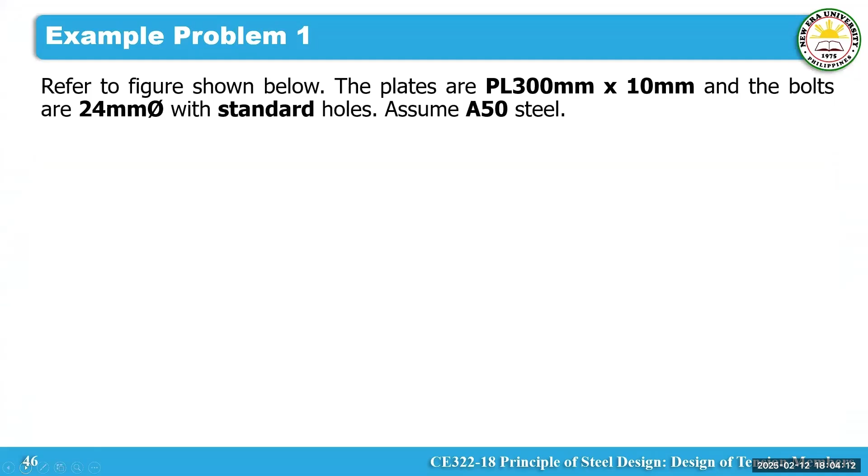Problem tayo ngayon. Example problem number one. Okay? Sige, pakibasa nga to.

Pakibasa nga yung problem natin. Mr. Aaron Marcelino.

Calculate the design strength in kilonewton against yielding failure. Ay, yun ba yun? Obviously, you need to start dito, no? Ay, sorry, sir.

Refer to figure shown below. The plates are PL 300 millimeter by 10 millimeter, and the bolts are 24 millimeter with standard holes. Assume A50 steel. Calculate the design strength in kilonewton against yielding failure. Determine the net area in millimeter squared and find the design strength in kilonewton against rupture failure.

Okay, sige. So, thank you, no? So based sa problem, yung problem natin, it involves splice plate connection as shown, no? So single lang yan. Single tayo. Meron tayong top and bottom plate, or pwede mo sabihin right or left plate. So depende sa iyo. Meron tayong 3 by 3 configuration ng bolt holes.

So yung letter item A, pinapahanap sa atin is yung design strength, yielding failure. So item A.

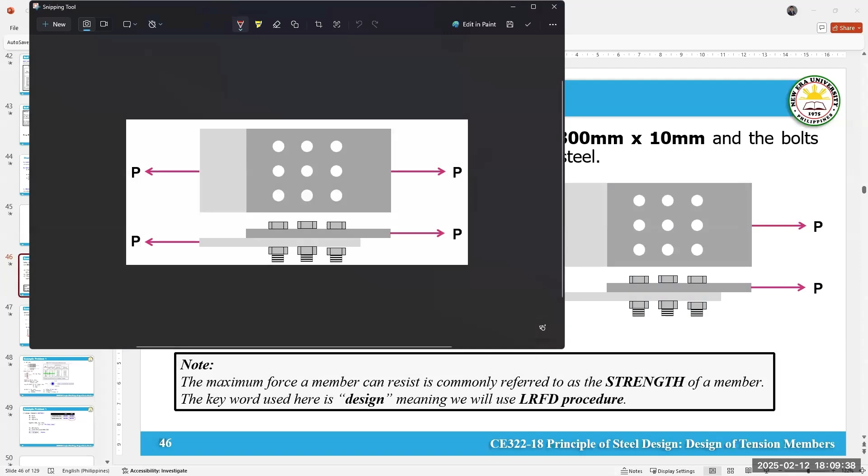Ay, okay, so yielding daw, no? Yielding. So ang sabi natin kapag yielding, if we would go back again dun sa kunin natin itong figure natin para mas may makita tayo. Kung kukunin natin yung figure na yan and ang usapan natin is yielding, so common sense yun. Kung yielding, it would happen dun sa gross area.

So kung gross area yon, sabihin natin sa top plate muna tayo magko-focus. Yung pinaka ano mo talaga, yung pinaka gross area mo would be here. Would happen here. So pag tumingin ka sa top plate, andito yon. Okay? Yan yung gross area natin. Okay? Yielding daw eh.

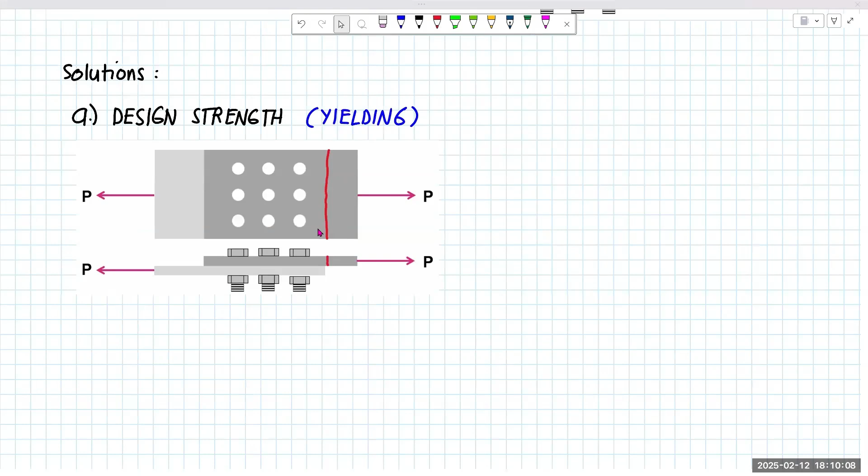And nung nag-section tayo, obvious din yon. Ang makikita mo is somehow yung ganito, no? Ito yung makikita mo. Okay? Ito yung pinaka makikita mong section. Okay?

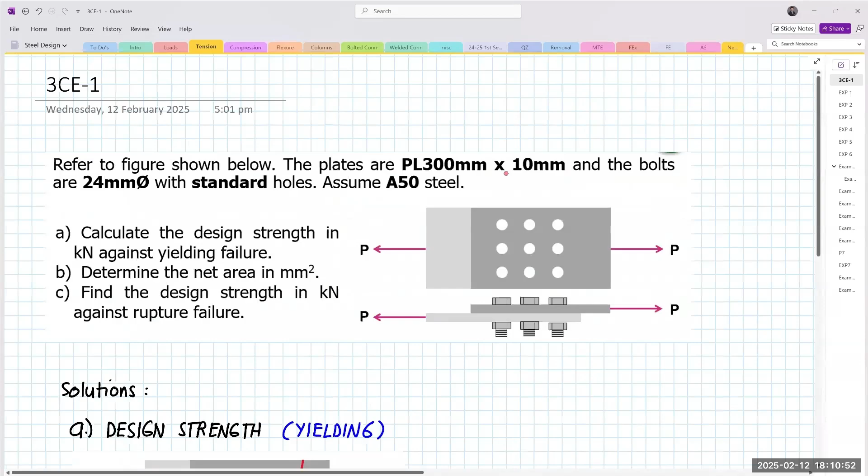Okay? And we have a dimension as per problem. Ang sabi, ang total width mo daw 300, thickness is 10 millimeter. Okay? So all in all, you will have this distance, no? 300 millimeter, and this distance naman, okay, na 10 millimeter.

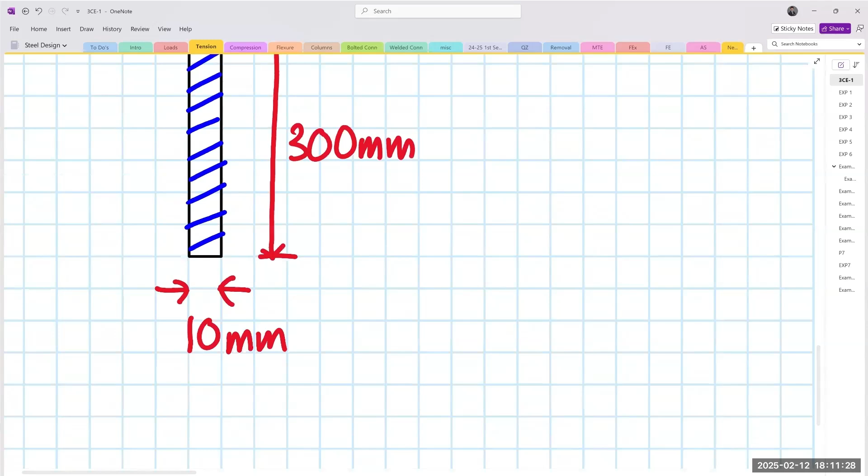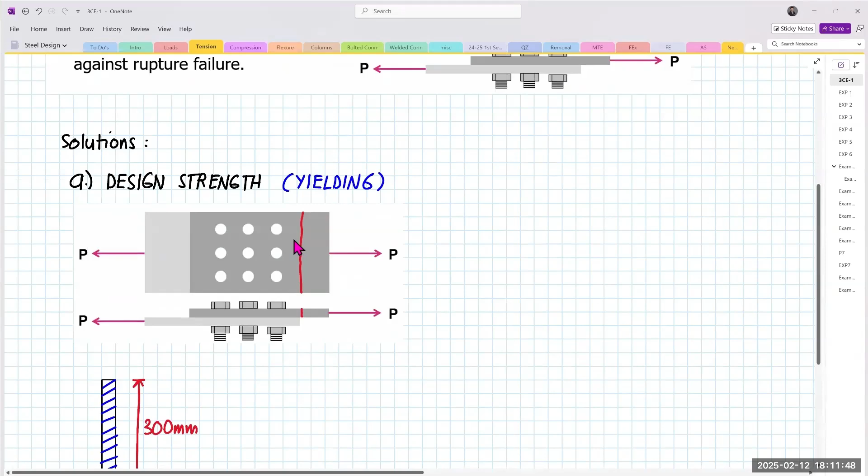Okay? Now, if we would go back dun sa formula ng yielding, going back sa presentation natin kanina, okay, alam niyo na to. The formula for nominal capacity is P sub n equals to area gross, tapos Fy. Yan lagi yung magka-partner pagdating sa yielding mode of failure. So we could say now na yung formula natin is P sub n is equal to area gross times yield stress F sub y.

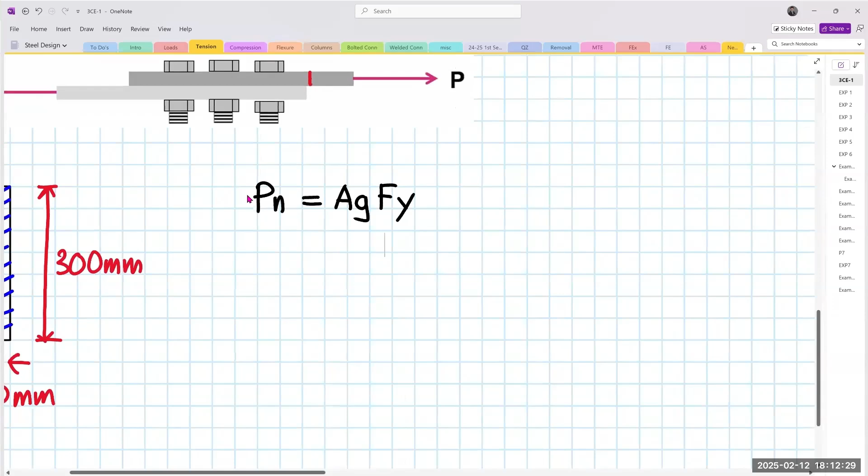Now, ang pinapagamit kasi sa atin as we have discussed, LRFD. And this is nominal value pa lang. So, going back dun sa formula, pag LRFD, ang pinapagamit, yung design strength talaga natin, P sub U is equal to phi sub T times P sub N. So, i-list natin yung mga formulas na gagamitin natin. So, we could say now that P sub U is equal to the strength reduction factor phi sub T times P sub N.

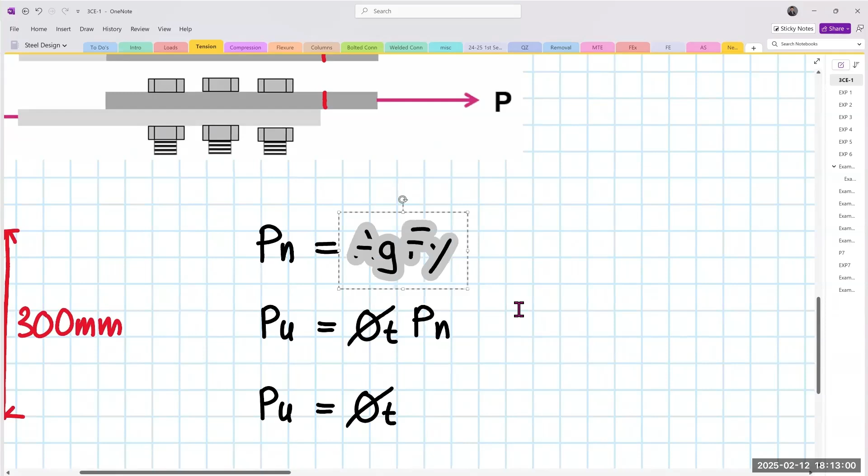Okay. Now, there's something that we could do to simplify our calculations. We could plug in yung value ng P sub N na ito. So we could say na from this equation, we could simplify it further para isang calculation na lang. And then this would be our final values. Final values. So sige, i-solve natin yan.

Okay? So P sub U now, or the design strength against yielding, is equal to the phi sub T, and yung value ng phi sub T natin, ano yung value natin for yielding? 0.9, as per code. Okay? 0.9.

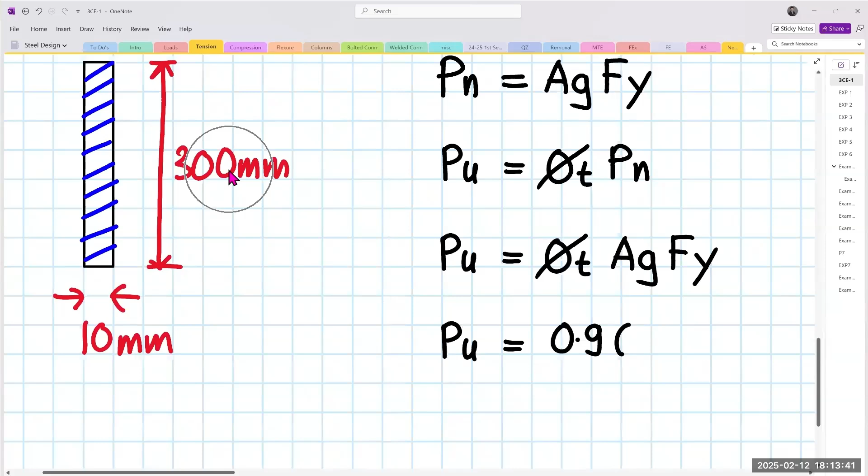Okay? And then yung area gross daw natin, going back tayo dun sa section cut, gross area 300 by 10. Okay? 300 by 10, okay, times F sub Y. F sub Y, so yield stress. So again, dito, kapag ka sinabi A50, ano ba yung Fy na gagamitin natin?

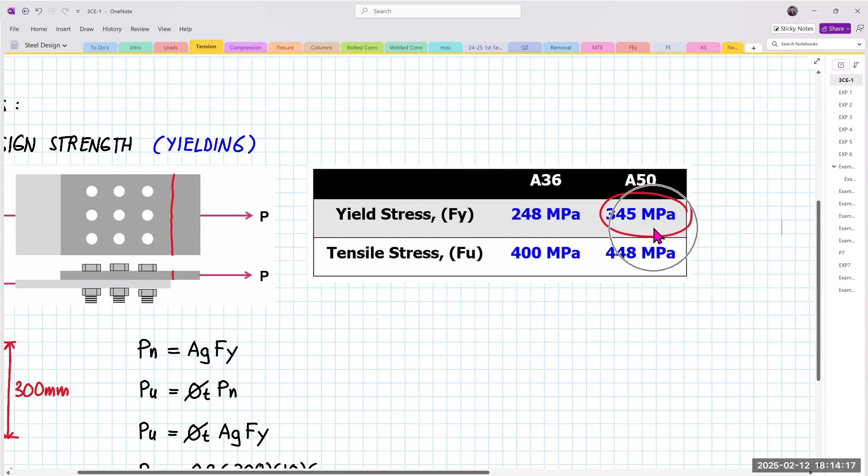We said that for A50 steel, its counterpart has Fy equal to 345 MPa. So let's use 345 for our Fy.

Okay, MPa. Now let's do a unit check. We'll only do this once; for the rest of the equation, it's most likely the same. Let's simplify. So this, the 300 and the 10, is in millimeters. The 345 is in MPa.

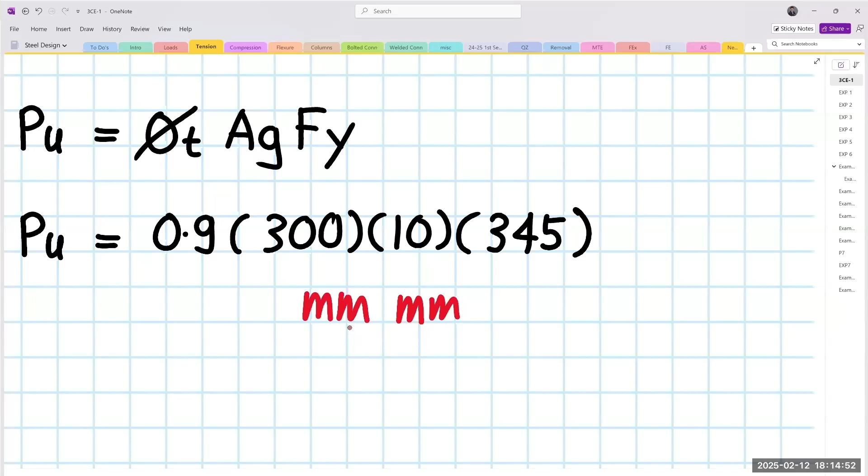I want to emphasize this, though you already know it. 1 MPa is equal to 1 Newton per millimeter squared. So that means this 345 MPa is Newton per millimeter squared, and therefore you can cancel out the millimeter, leaving Newton.

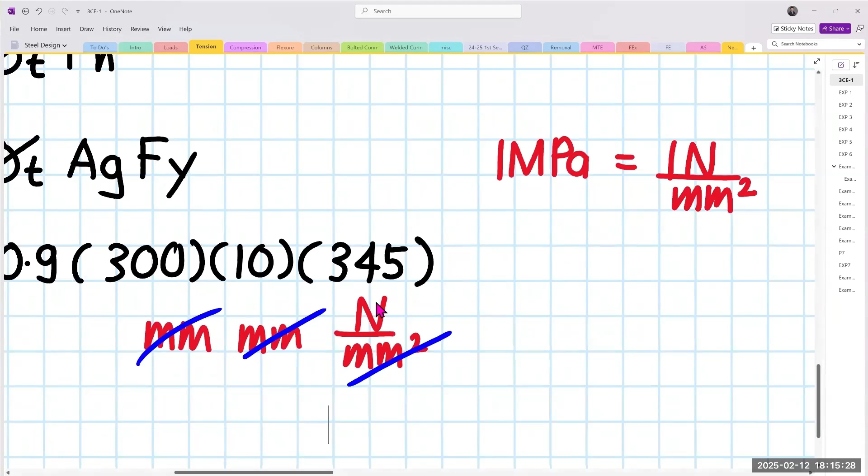But for calculating capacity, we want kilonewton. So we still need a conversion factor to account for this. We already know that one: since Newton is in the numerator, we convert Newton to kilonewton. 1 kilonewton is equal to 1,000 Newton.

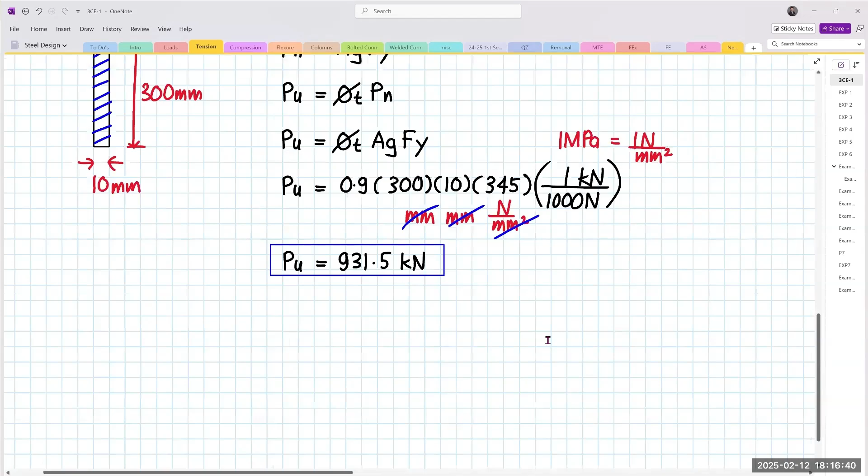Item B asks to determine the net area. This is just preparation for item C, since you can't calculate the rupture without the net area. So let's calculate the net area first.

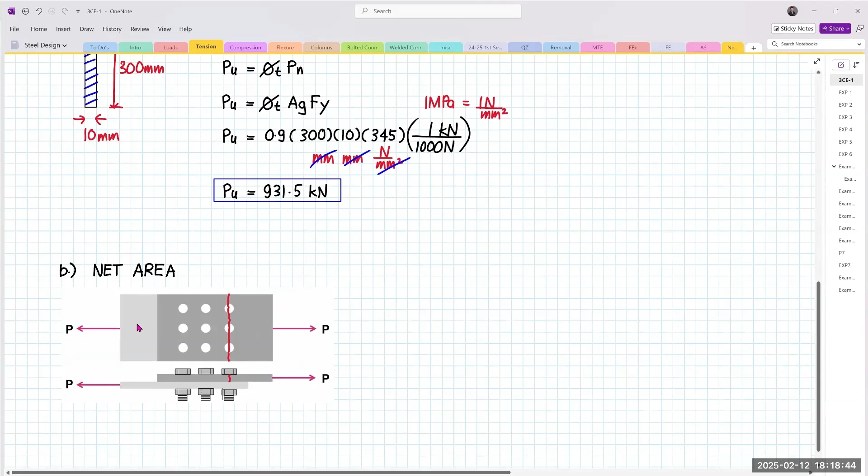Since the width and thickness of both plates are the same, whether you consider the top or bottom plate, the result would be the same, because both plates carry the same load P, just equal but opposite in direction.

So when it comes to rupture, as we discussed, if we look at the top plate, the critical one is this first line of bolts, in terms of the rupture. Now let's calculate, since we made a cut here, we have a section cut.

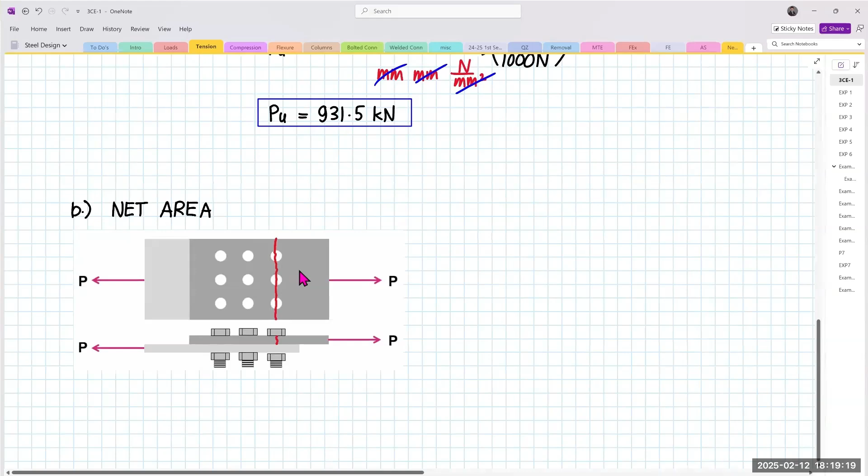We need to sketch our area again, for the sake of this demonstration, to show our failure path, or our section.

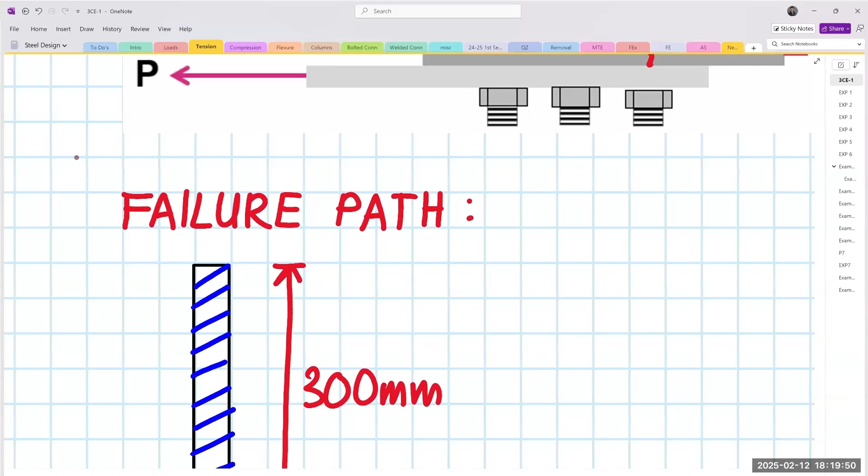So this one is for the gross area. Let's delete these areas and add the width for the bolt holes, assuming these are our bolt holes. Here in the section cut, three bolt holes are hit. This is the first, second, and third bolt hole.

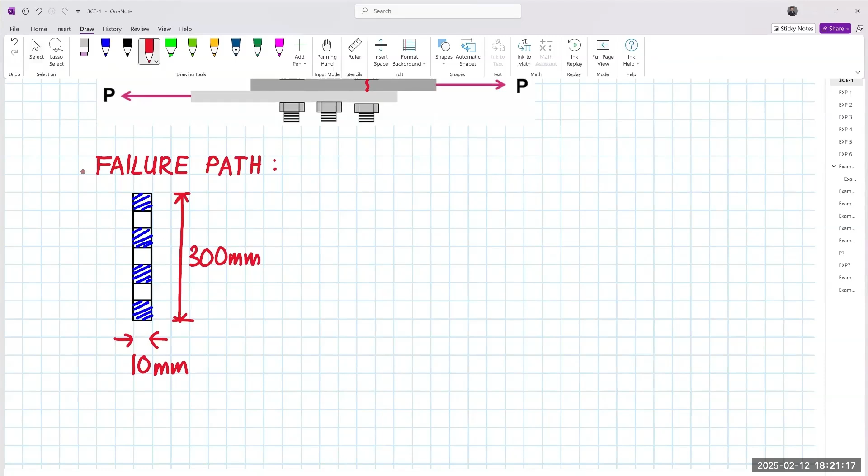And therefore, to calculate our areas, we need to determine these distances. These are the distances, as we already discussed earlier. These are our bolt holes.

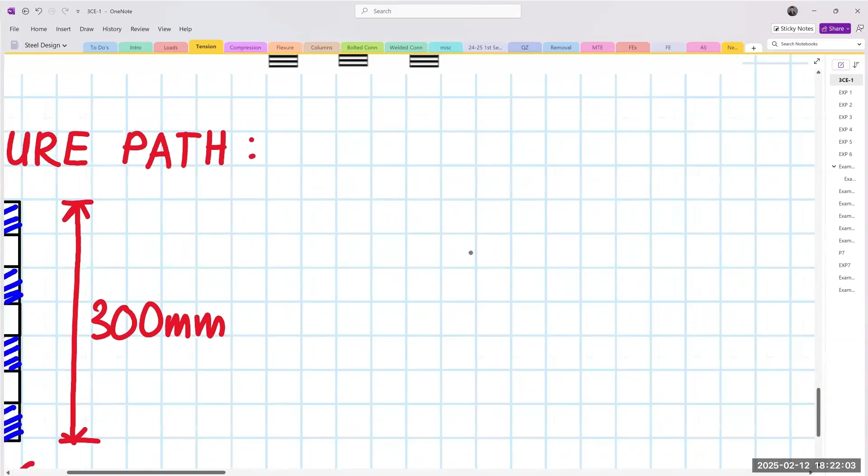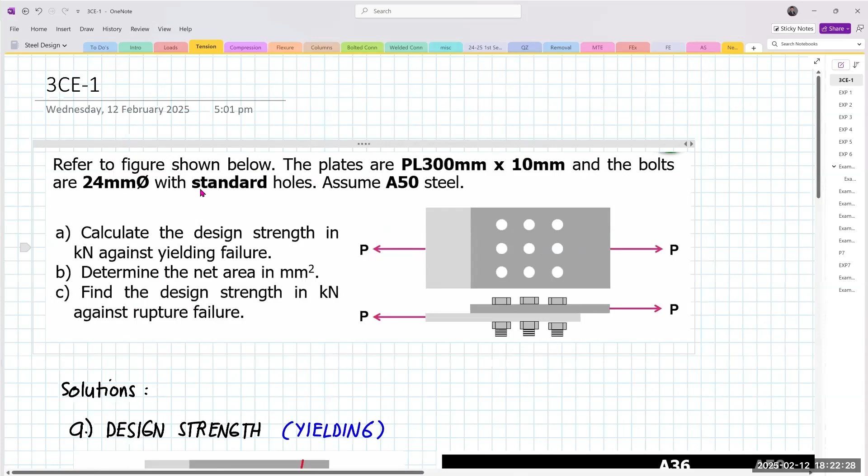D sub B. Which is ano yung binigay sa problem? Sa problem, gamit daw tayo ng 24 millimeter diameter. And ang clue for the hole dimension is standard. Gamit daw tayo ng standard. So 24 millimeter yung diameter of bolts.

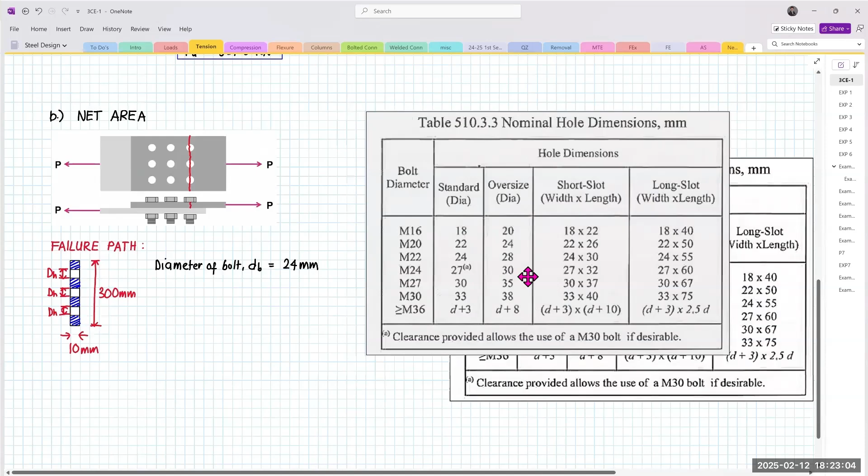Para mas masolve natin to ng maayos, we need to go back dun sa table, pagdating sa nominal hole dimensions calculation. Yung table na to, copy natin yan, tapos dalhin natin dito para mas ma-reflect ng mas maayos. Kung i-check natin yung ating mga values, ang sabi sa problem, 24 millimeter na bolt diameter. Ito yung column na yon.

Tapos, ang sabi niya, gamit ka daw ng standard. Ibig sabihin ng counterpart niya, na nominal hole dimension is 27. Yan yung ating nominal hole dimension. Sulat natin dito.

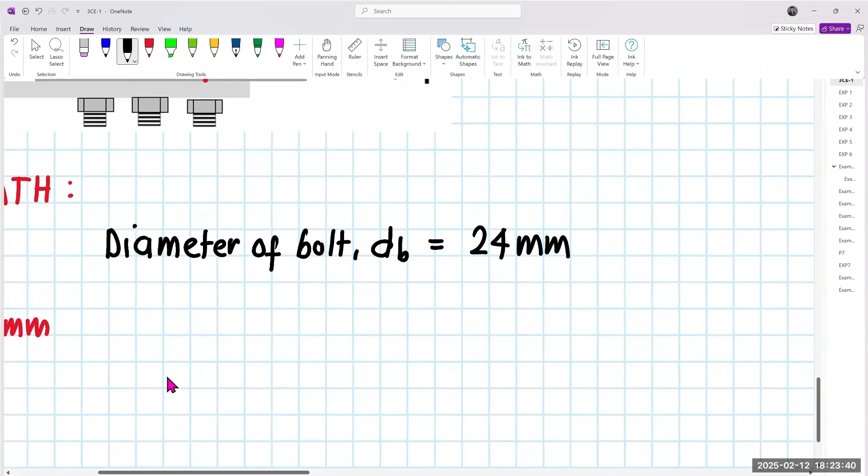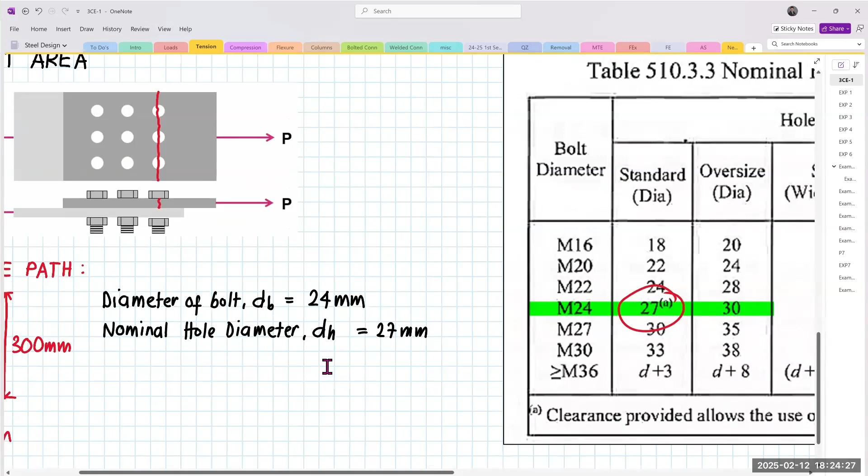Dito, small letter D sub H tayo, sabi natin we need to use 27 millimeter. Pagdating dito sa tinatawag nating tolerance, basically yung tolerance na yun lang yung, yung tawag dito, difference ng dalawa. So 27 minus 24, ibig sabihin meron tayong 3 millimeter na tolerance. Mas malaki yung ating hole dimensions by 3 millimeter, para magkasya yung bolt natin.

So we could say na yung ating tolerance na gagamitin natin dun mamaya on our calculation is equal to 3 millimeter. Now, going back dun sa final formula natin, napakita na natin kanina, that is this one. I-copy na lang din natin ulit. Since yun yung formula natin, we could say na ito talaga yung pinaka-formula natin na gagamitin.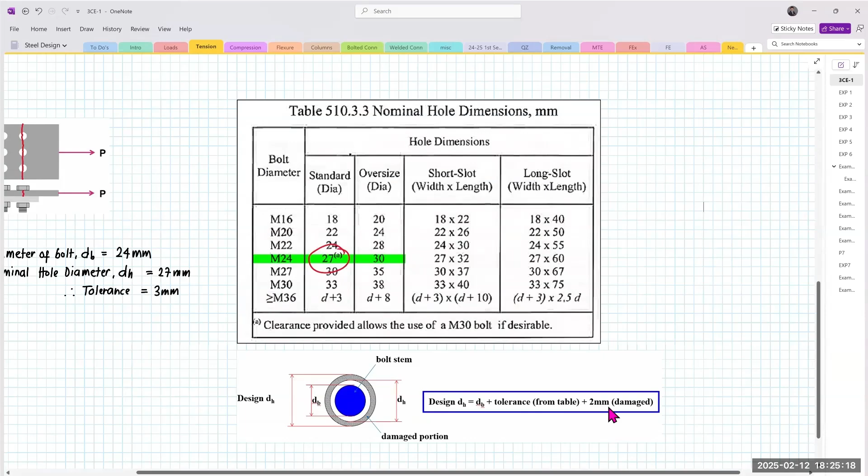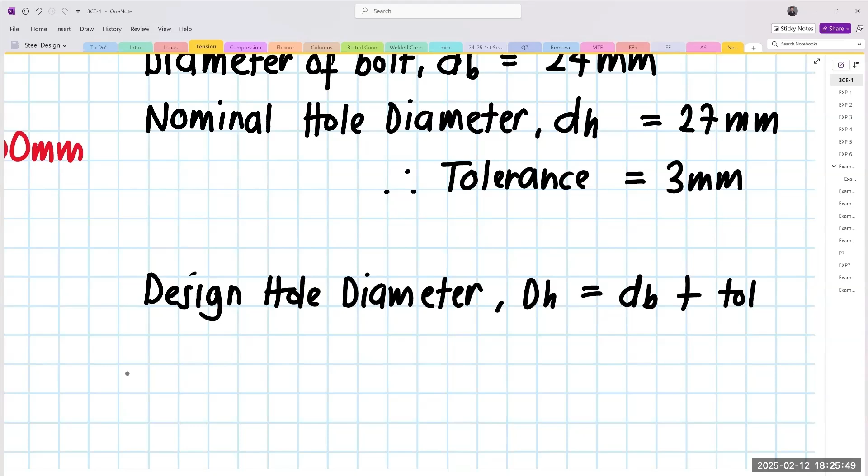So that is the design diameter, the diameter of the hole is the diameter of bolt plus tolerance plus the automatic 2 millimeter or the damage portion. So therefore, we can say now that the design hole diameter, D sub h, is equal to the diameter of bolt plus the tolerance plus 2 millimeter, for the damage portion.

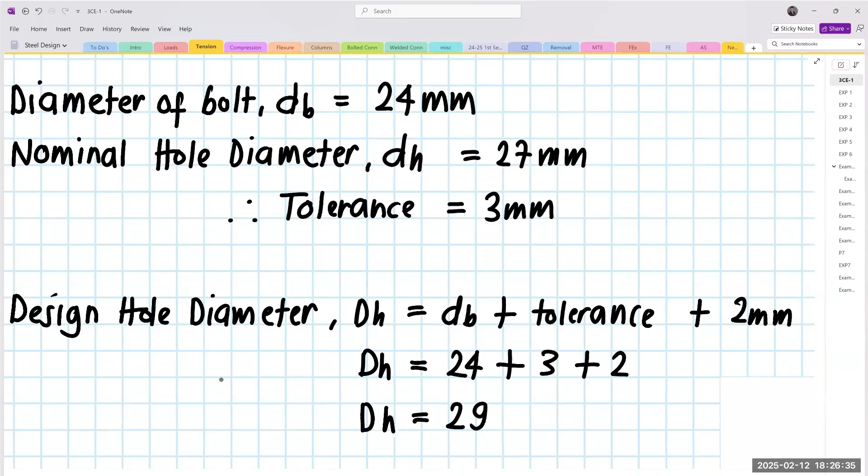So we would have the diameter of hole is equal to the diameter of bolt, that is 24, plus yung tolerance na na-calculate natin, 3 millimeter, plus 2. So all in all, we have the diameter of hole, design hole diameter na gagamitin natin equals to 29 millimeter. Ibig sabihin, na-define na natin yung dimension na to. Meron na tayong dimension na yan.

And then, as we have mentioned, yung net area kasi, yun lang yun eh. Yung lahat, yung sum ng area nung naka-highlight na yan. Ibig sabihin pala, kung i-define natin yung parang pinaka-formula talaga natin for area net, based dun sa logic na yun, we could say na yung ating net area, teka lang.

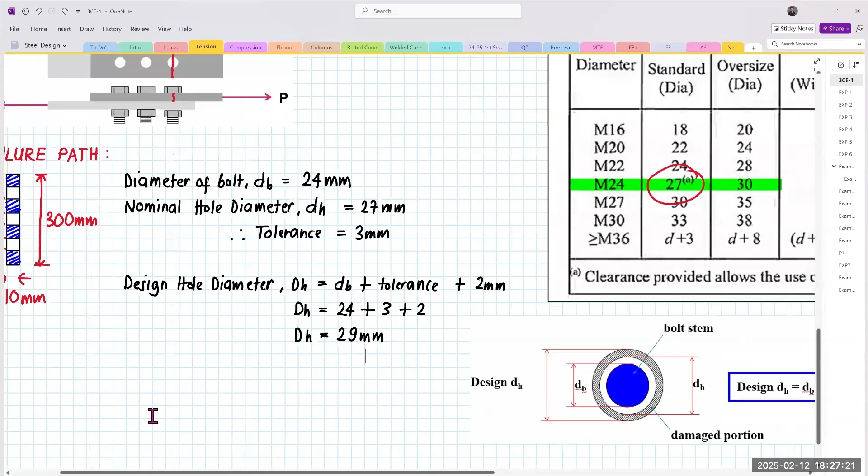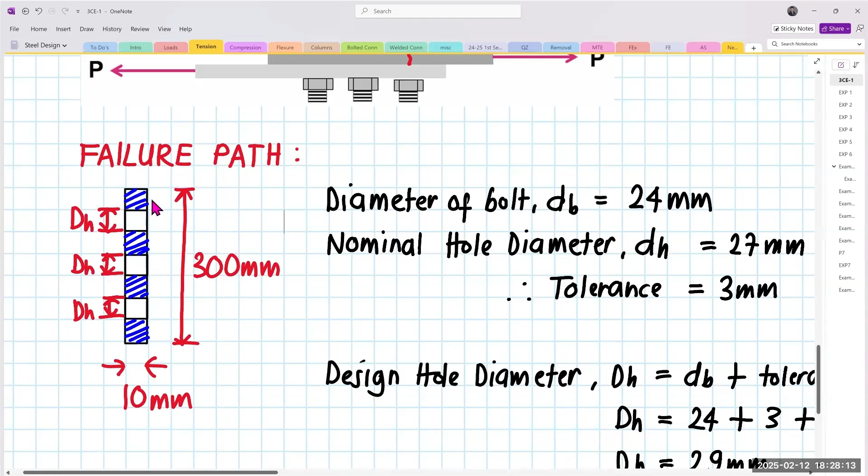Tapos ibabawas na lang natin yung area occupied by our bolt holes. Pag binawas natin yung area occupied by the bolt holes to our total or to our gross area, magkakaroon tayo ng blue shaded area, yung net area, na mag-resist dun sa applied load. So ibig sabihin, area net is equal to area gross minus yung area ng ating mga holes. As simple as that.

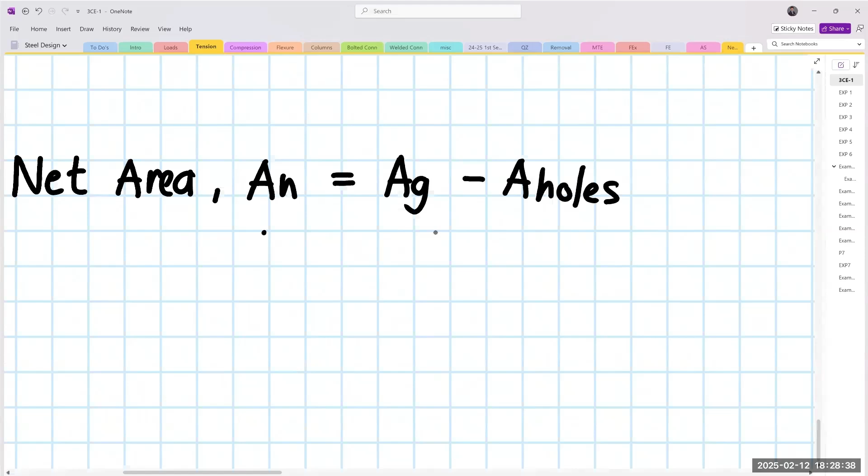Sige, calculate natin. So we could say now that area net is equal to area gross. Again, total width natin is 300, thickness natin is 10. Yung area ng isang holes natin, again area ng isang holes, 'di ba? As simple as ano lang 'yan eh, kung babalik tayo dito sa figure na 'to, ang area ng isang holes.

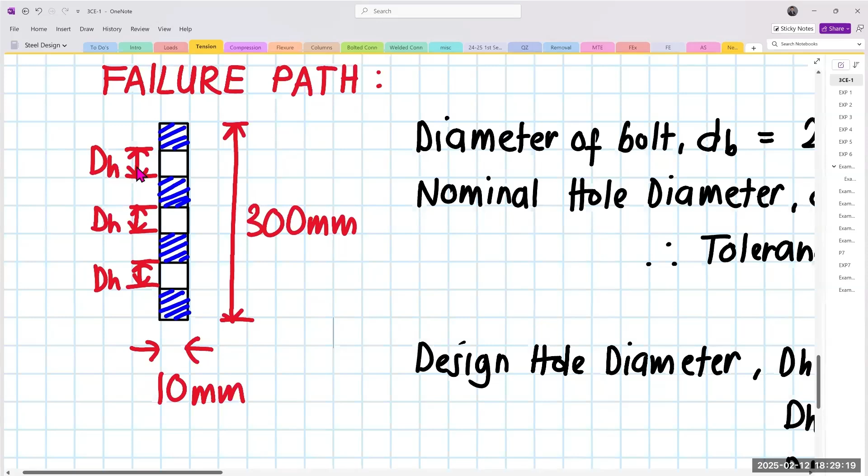Is the height niya, yung diameter of holes, times the thickness of your plate, which is yung 10 millimeter. As simple as that, height times length, or sabihin natin height times width. So yun nga, diameter of holes times thickness of plate, yun yung area ng isang bolt holes. Again, diameter of hole na-calculate natin, that is 29, yung width natin is 10. So 29 times 10.

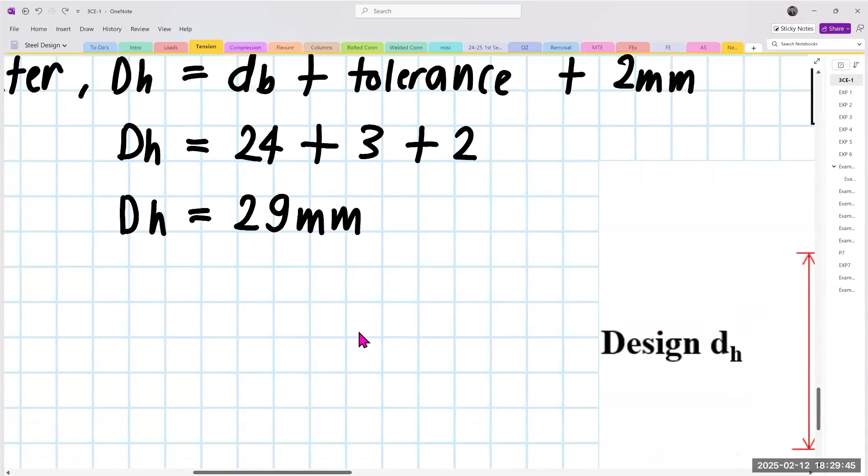But then again, this is just one area or one hole. So all in all, we have three bolt holes. So that means we need to multiply this by 3, the number of holes, multiplied by 3.

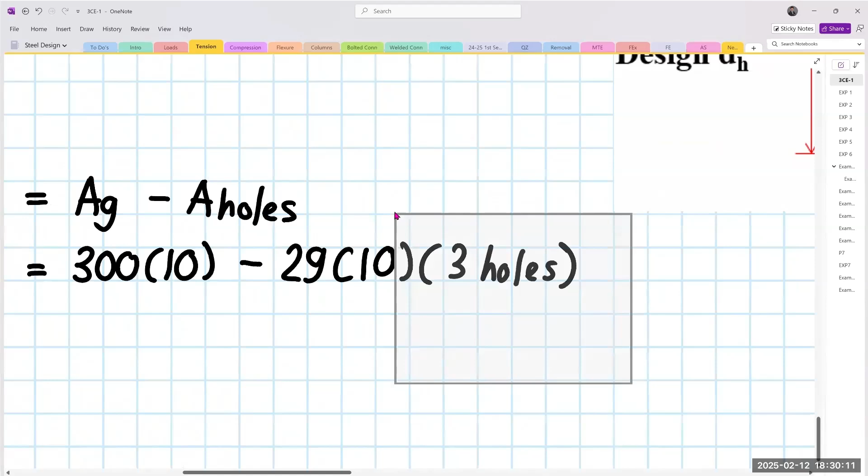So let's summarize our equation. We have area net equals... how much is this? 2,130. Okay, millimeter squared.

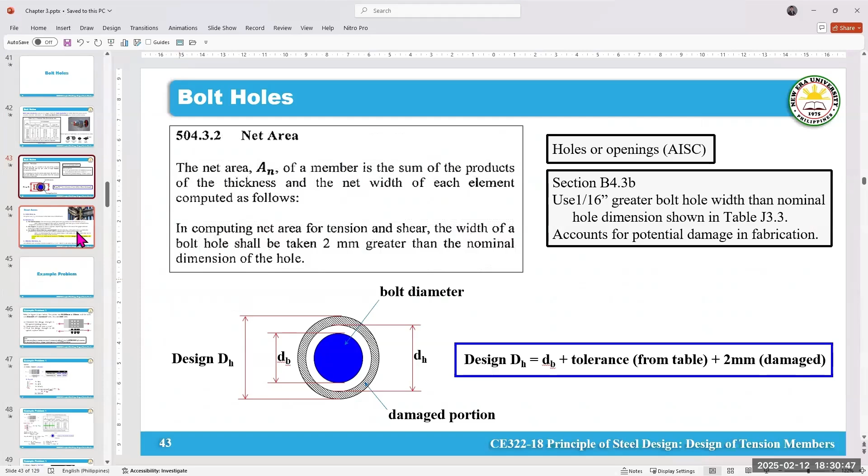So we're okay with the area net now, this is our answer. Before we end the discussion for this one, I want to reflect again on steel areas, although it was shown here for bolted plates that the net area is the gross area minus

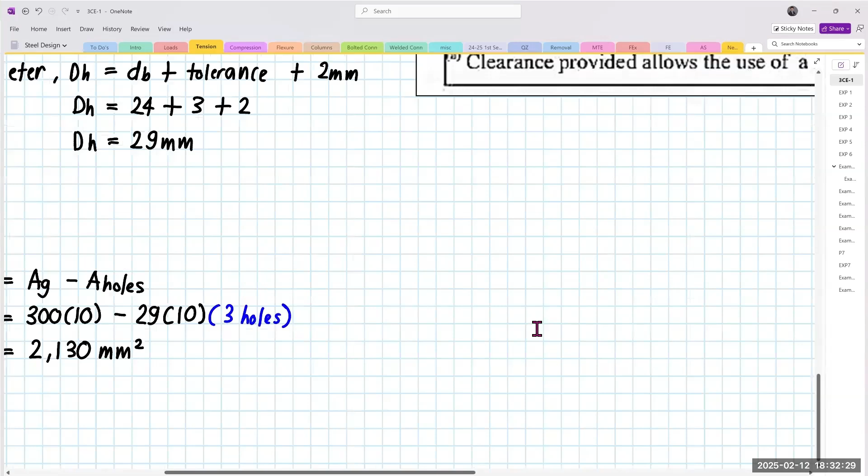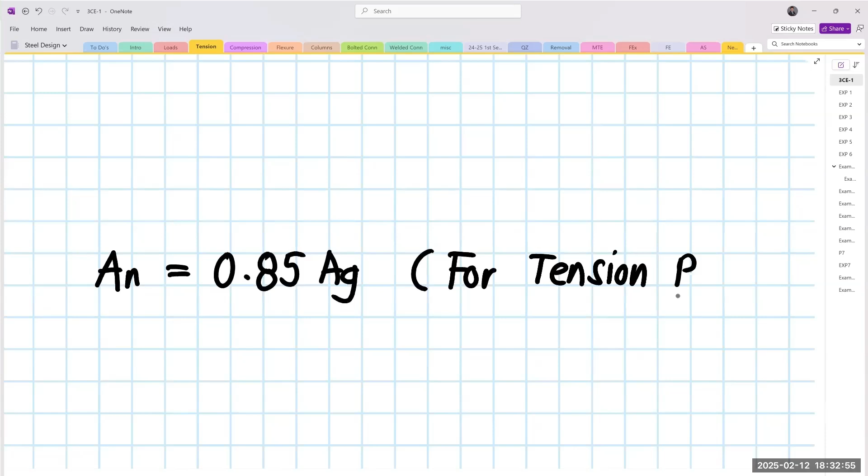Aside from this, we need to account for one more formula as per the code, which is our maximum limit for area net, equal to 0.85 AG. Let's take note that this one is for tension plates. Applicable, okay.

So let's hurry up to finish. We would have the area net, another value of area net that we need to check, so we would have 0.85 times the area gross, 300 times the thickness. Okay, we would have area net equal to... how much is this? 2,550. Millimeter squared, okay.

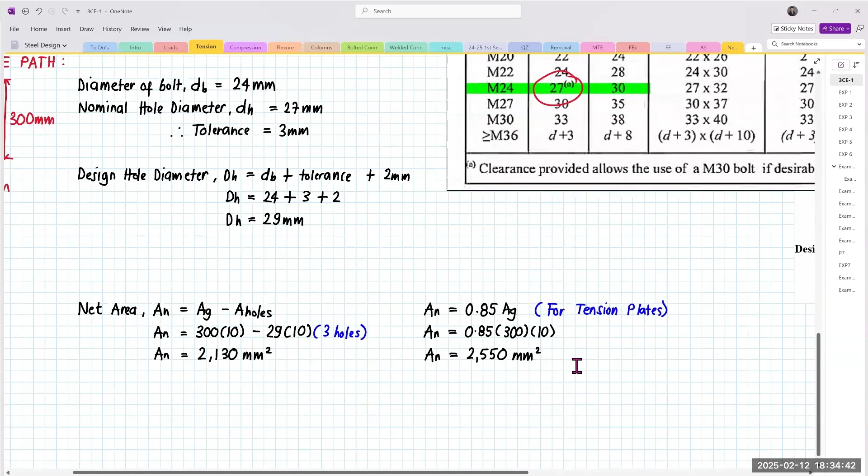So since our maximum limit is this value, and it's greater than the actual area net we calculated, that means we're okay, because it's bigger.

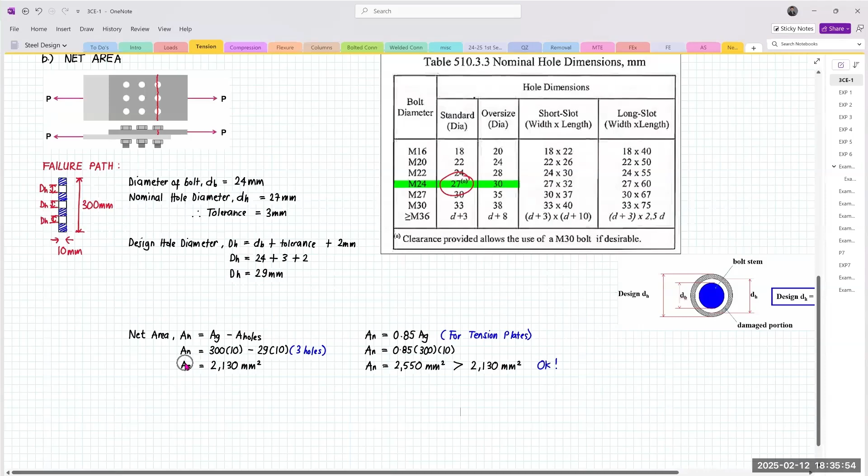Okay, so we already have the net area, we're done with item B. We'll now proceed to item C, which is the design strength against rupture failure, item C. Let me just get this.

Okay, rupture failure. Here we don't need much sketching anymore since we already sketched it in the area section, so we just need to go back to the formula. What do we say about rupture? Again, the nominal capacity P sub n is equal to A E F sub u.

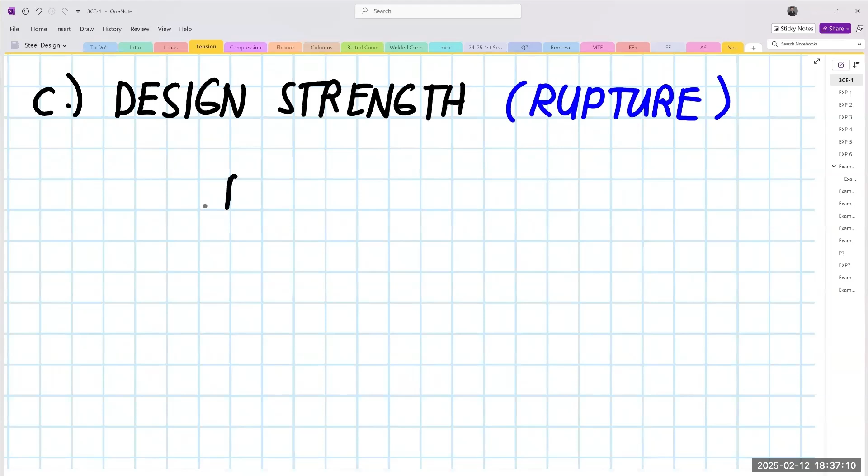So let's list out our formulas. The nominal capacity for rupture is as simple as P sub n equals A sub E, the effective area, times F sub U. Now we need the design strength, meaning we need to get P sub U, and here's the formula. Let's copy again, phi sub T times P sub N, that's our P sub U.

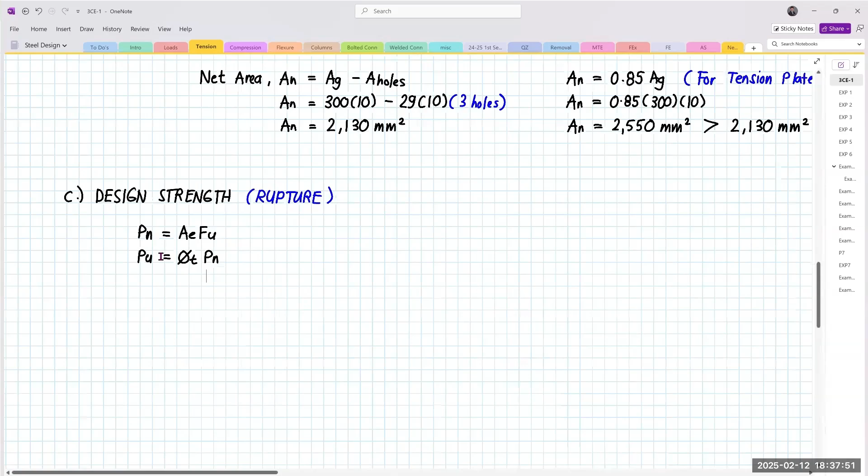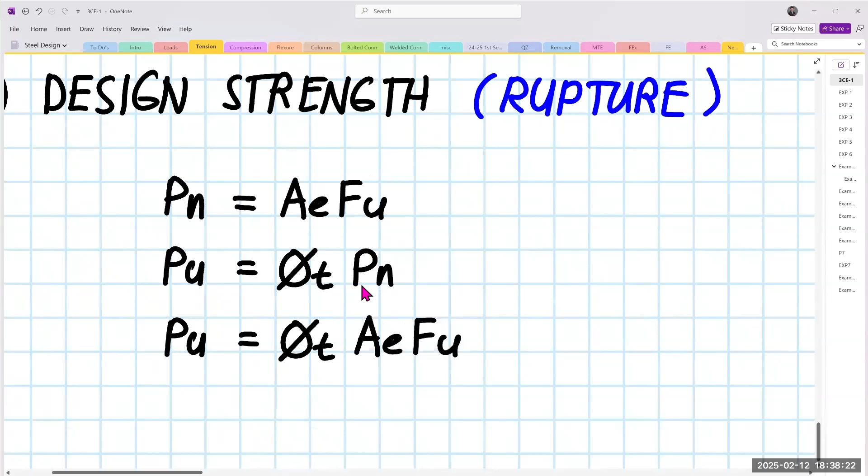Now, still the same, let's discard this, we already have this one. So we might as well simplify by plugging in the value of P sub n, which is this. Let's copy that, and this would be our enhanced formula. Now, I just want to note that this one is critical, or it governs.

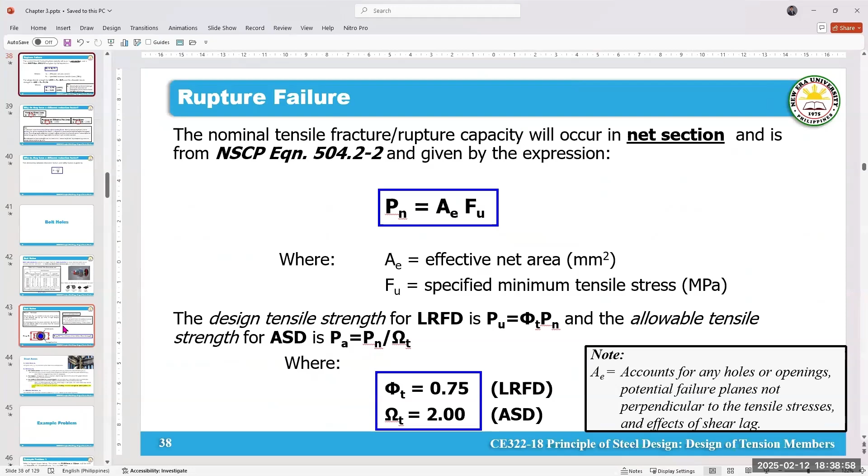Ang problem is yung nakalculate natin na area as of the moment, area net. Wala pa tayong A sub E. Okay, so ano ba ibig sabihin ng A sub E? Puna tayo dun sa still areas calculation. Yung A sub E, or the effective net area A sub E, is...

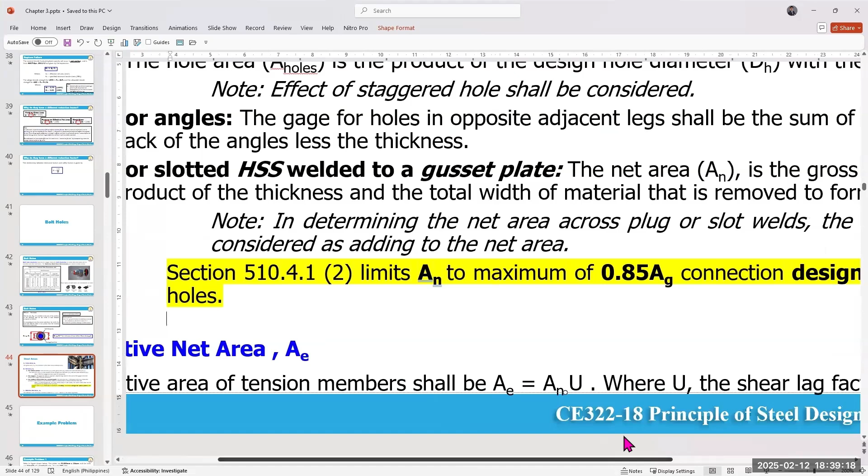This equation: A sub E is equal to area net times the factor, the letter U, which is the shear lag factor. So yun pala yung formula ng effective area. Ang sabi sa code, the effective area is equal to the shear lag factor U times area net.

Now, meron na tayong area net. Na-calculate na natin yung area net, andito sa taas. Ang question ngayon is, ano yung shear lag factor natin?

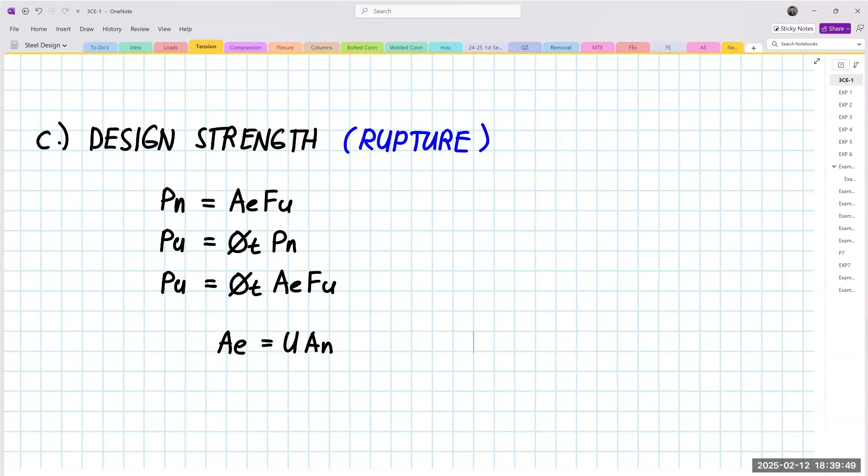Yung shear lag factor natin for this problem is actually equal to 1. Yung explanation kung bakit equal to 1 yan, paki-hold muna on your mind. Darating tayo sa shear lag, i-explain ko doon kung bakit equal to 1.

But let me repeat again, para mas malinaw lang. Isulat natin dito, this is the effective net area, A sub E. I-emphasize ko lang, the shear lag factor for this case is 1.0.

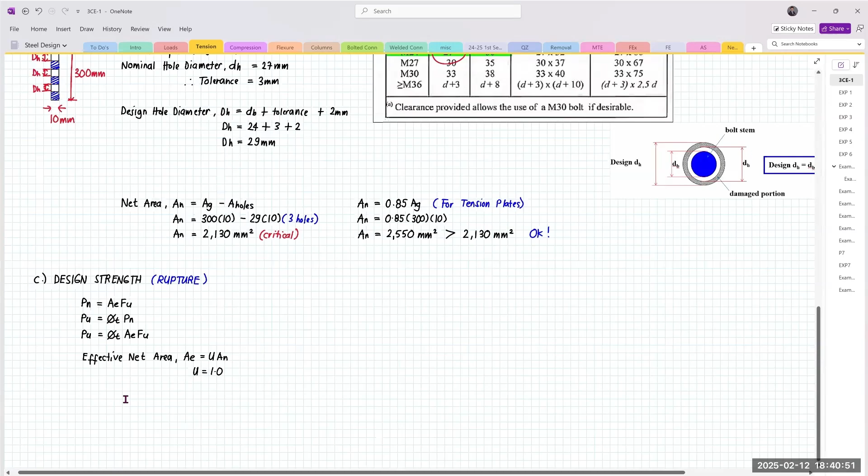Yung explanation we would explain pagdating sa shear lag. But for all tension plates, applicable pa rin to. For all tension plates, the shear lag factor U is always equal to 1. Explanation, the shear lag factor natin pupuntahan.

Since ito na from this equation, medyo yung AE natin is equal to this equation, so might as well plug in dito. Ang matitira is yung kulang na F sub U. Ito yung magiging parang pinaka-final equation natin.

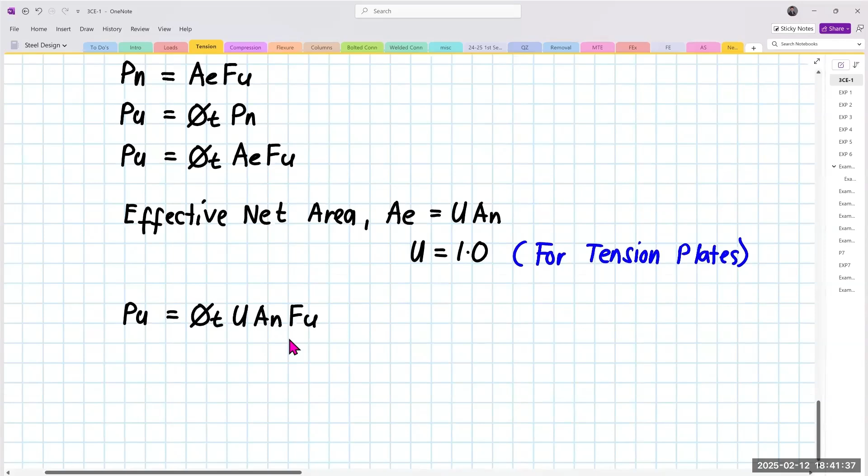Okay na to and complete na yung given natin. We could now plug in yung mga values natin. Yung values natin is again yung phi sub T for rupture, binigay na to. Palit tayo doon. For rupture daw, the phi sub T is 0.75.

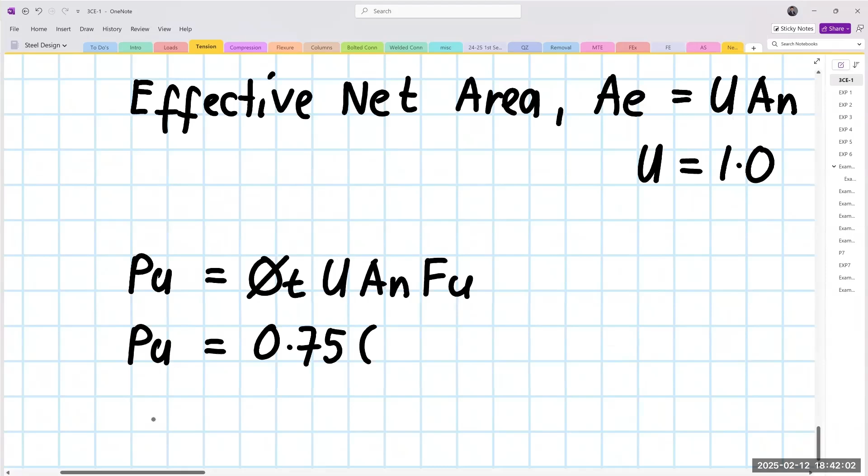So we have 0.75 multiplied by the shear lag factor U equals to 1.0, times area net, yung nakalculate natin kanina, multiplied by F sub U.

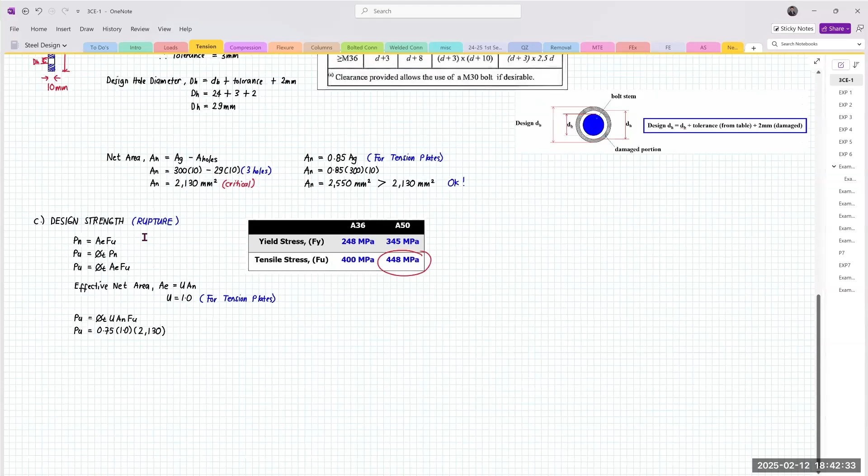Now, on this one, since A50 steel yung gagamitin natin, ito yung table natin. Ang counterpart nung A50 pagdating sa FU is 448 MPa, gamitin natin yon. Divide by 1,000 para maging kilonewton.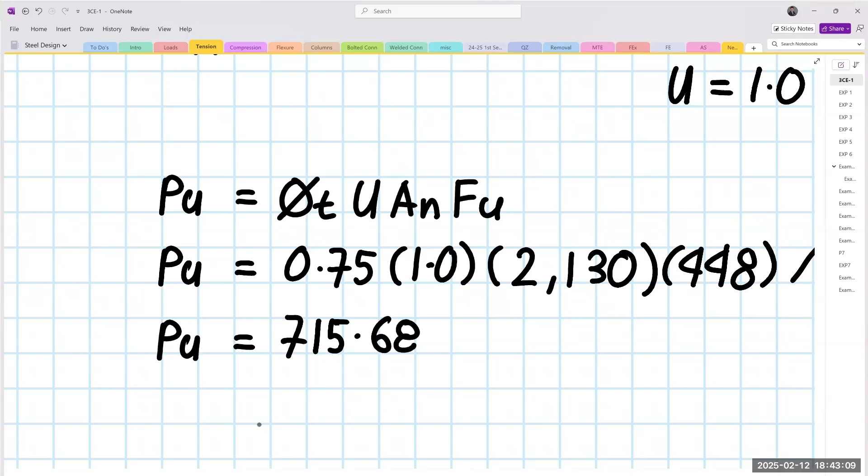So we would have our design strength against rupture equal to ilan? 715.68 po. Okay, sige. 715.68 daw. Okay, sige.

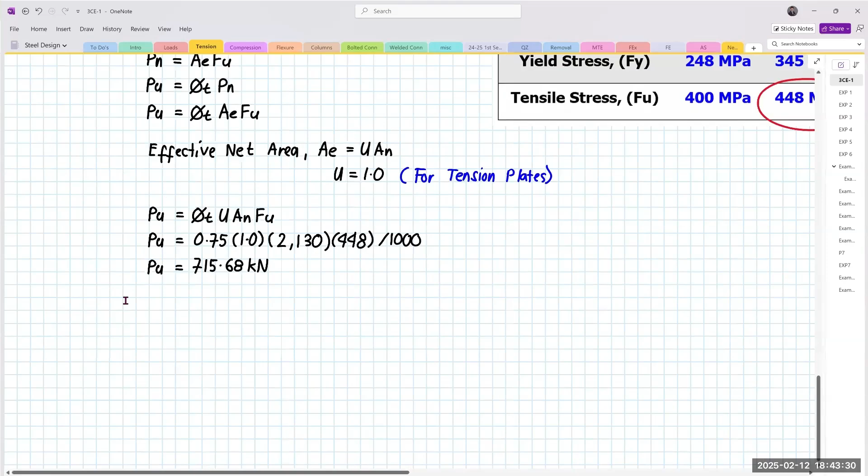I-finalize natin yung mga sagot natin. Ito yung sa yielding, ito yung sa area net, and ito naman yung ating rupture. Design strength on rupture. Basically, okay na, kompleto na yung ating sagot, and that actually close out itong problem na to.

Unless may question kayo, may clarification, meron bang malabo on this problem before we proceed on the next topic? Okay, good. Malinaw na walang nagtatanong eh. Sige, ito ngayon ang tanong ko kasi ayaw niyo magtanong eh.

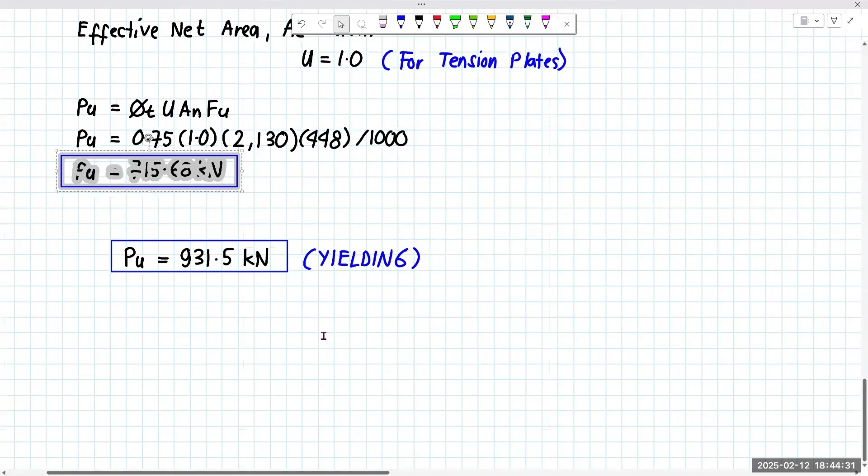Ako magtatanong. Ngayon, since gusto nating mag-formulate ng conclusion, lumalabas na yung design strength for yielding is 931.5. Okay, 931.5 yung for yielding. So while yung kay rupture naman, yung na-calculate natin, na 700... okay, ito yung rupture na capacity or strength ng ating connection.

So ngayon ang question ko, meron tayong dalawang design strength considering different mode of failure. Ang tanong ko, what would be our final design strength? Yung mababa or yung mataas? At bakit?

Hello po. Yes, Mr. Bernardo. Bernardo po, Joseph, sir. Opo. Need po natin yung mas maliit na design strength. Kasi po pag pinili po natin yung mas malaki, ang mangyayari po nun, hindi na po aabot doon sa design strength, magma-maximum na po kaagad siya, kaya magpa-fracture siya. Kaya mas kinakailangan po natin yung mas maliit na design strength para pumatak po siya doon sa hindi siya magpa-fracture.

Okay, so tama yun. Yung kukunin natin lagi, yung maliit na value. Yan tama din explanation niya.

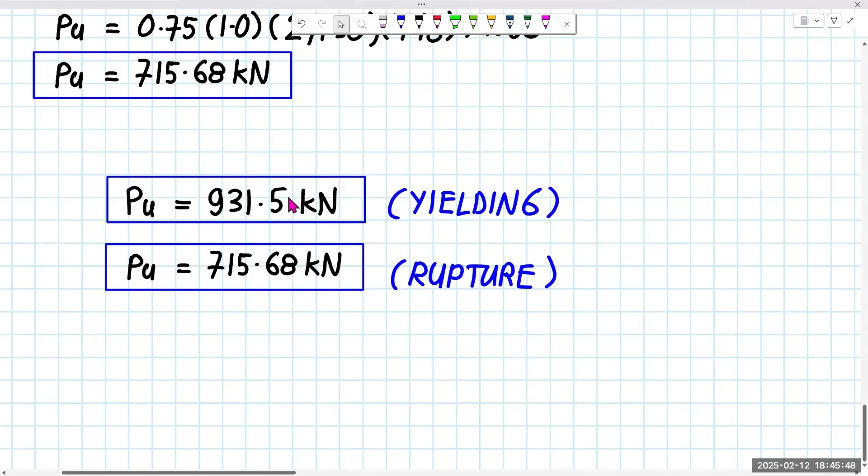Okay, so halimbawa, sa drawing, sinabi mo sa client, ang pinili mo itong mataas. So sinasabi mo na 931 kilonewton yung capacity ng member mo bago mag-fail. Nilagay mo sa drawing, ito yung capacity ng connection mo. Pero yun nga, hindi ka pa nakakarating dito sa 931, 715 ka pa lang. Nag-fail na agad yung connection mo kasi nga, yun lang yung capacity niya against rupture.

Okay, so ang pinaka-safe na sagot, kunin mo yung pinakamaliit. Hanggang dito lang yung connection mo. Sabihin mo sa user, hanggang dito lang yung connection mo, huwag mong sosobrahan. Okay, so tama yun, yung pinakamababa. Very good.